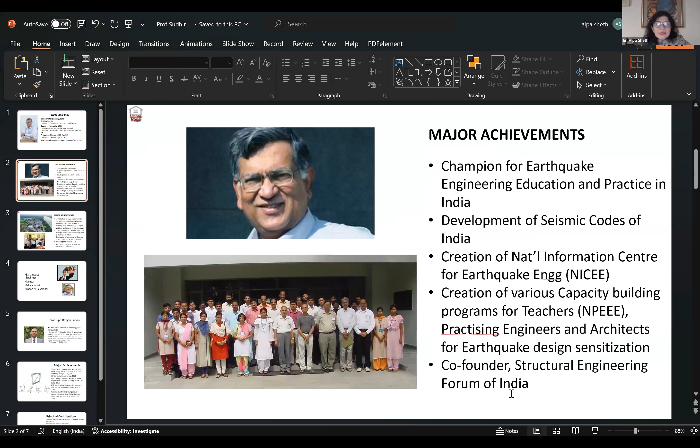So, I think most of us know about Professor Jain's achievements. He has been a champion for earthquake engineering education and earthquake engineering practice in India. I would say that in some ways he ended up being such a rock star as far as the dissemination and sensitization of earthquake engineering in the country, that one of the complaints I nowadays have as practicing engineers,

is that young engineers who are coming out are more worried about the buildings' behavior during earthquakes, and they are not in the least bit bothered about the 24/7 gravity loads. So I would say that this in a way is a compliment to his persuasive abilities in putting the agenda of earthquake engineering in the forefront.

And I think that definitely everybody would accept that he has been the principal leader in this field of earthquake engineering in India. He's also been one of the leaders in the development of seismic codes of India. And I hope that there'll be more participation from him in the time to come.

He's also created numerous institutions, one of which is NICEE. I think anybody who is presently in SEFI must have at some point in their lives gone to the NICEE website or gone to IIT Kanpur and tried to utilize the resources available at NICEE.

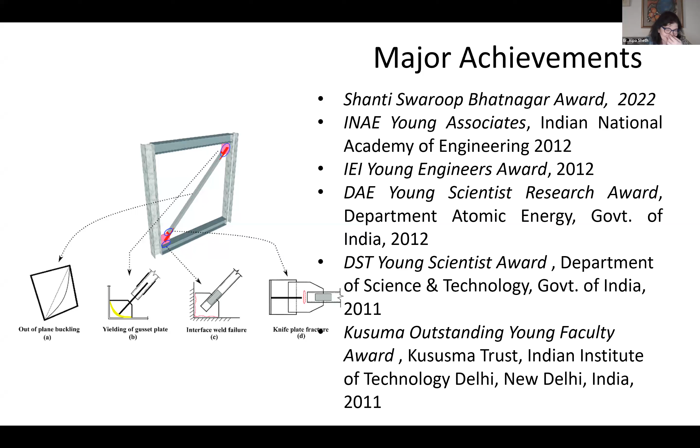So I think Professor Sahoo has displayed amazing ability at a very young age, and Professor Sudhir Jain and of course Professor Durgesh Rai must feel very proud of their student, their protege, if I may. And I would like to hear what they did right, and what was the special bright spark that they had seen in Professor Dipti Sahoo. And as I said, the principal contributions of Professor Sahoo have been in energy dissipation devices.

I had actually once connected with him for buckling restrained braced frames because it was something I was very interested in. And I even talked to him about steel plate shear walls. He's always very interested in trying out new things, and he's a fountain of energy and excitement. So it's a joy to work with him, especially when it's not just about getting a project peer reviewed and stamped, because that's what unfortunately a lot of the IITs now have to do because of pressures from various authorities. Professor Sahoo was refreshingly different, if I may say that.

So here, I would like to stop talking because we've congregated to hear the two speakers, the two celebrated and recognized leaders in this field. So over to you, Professor Jain. Thank you.

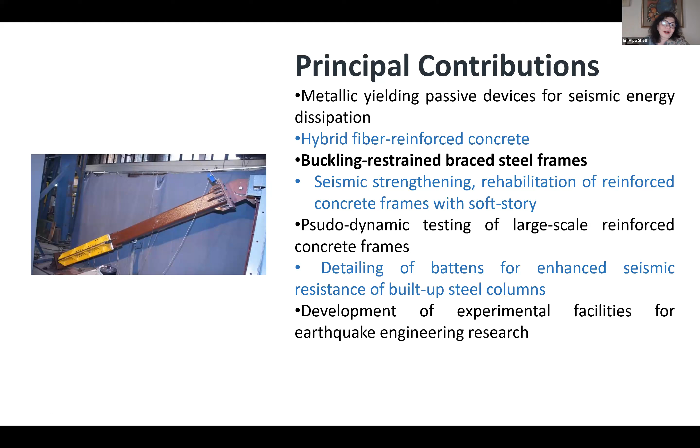All right. Thank you, Alpa. I don't have slides; in my current role, I don't get time to do justice to these kinds of expectations. Thank you for your very generous introduction and for this opportunity to come back to the structural engineering community. I see 110, 115 people showing up as participants. So this is a life that I left behind. And once in a while, when I meet people from a structural engineering background, I'm really delighted.

I'm very, very proud to be claiming that I have been Dipti's teacher. As I have fondly said, we teachers get the reflected glory of our students. If our students do well, we become well known. We claim that we are their teachers.

So I'm really, really proud of Dipti and for what he has done and what he continues to do in his career. And I wish him many, many more successes.

Now, the topic that you gave me to talk about is how to develop the temperament for research in the structural engineering community. Let me start out by first asking a question. What is research? Is research publishing papers?

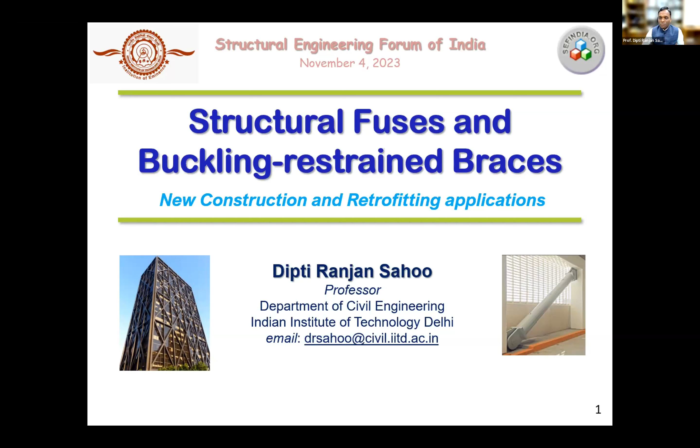So I will quickly highlight the work my group and my students are working on. I will be highlighting the work which is relevant to energy dissipation. So the topic is structural fuses and buckling-restrained braces. I will also talk about the applications in new construction and retrofitting applications.

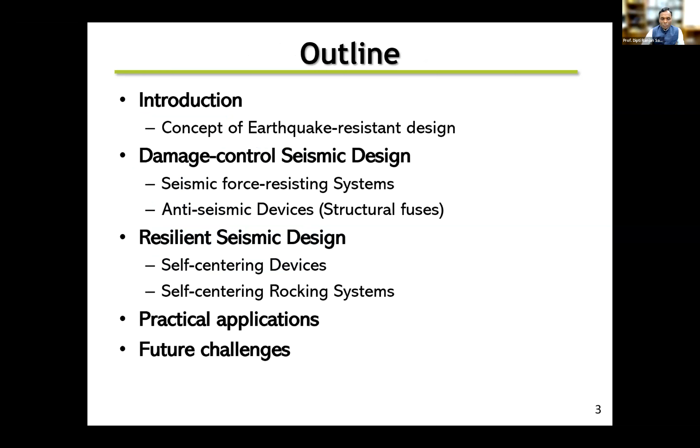So just to outline today's presentation, I will briefly talk about the introduction. I will try to highlight two things. One is called damage control design. One is called resilient design. Then I will come to the practical application and what the challenges are. I thought that will be most useful for our young engineers and researchers to think differently in the context of seismic design.

So till now, in earthquake resistant design, we don't design a structure to remain elastic because it has the inherent properties of post-yield strength, whether it's the material or the redundancy. So we expect that the structure should go to the inelastic range, and instead of linear elastic behavior, we expect inelastic behavior, and that means you are actually expecting some kind of damage in the structure.

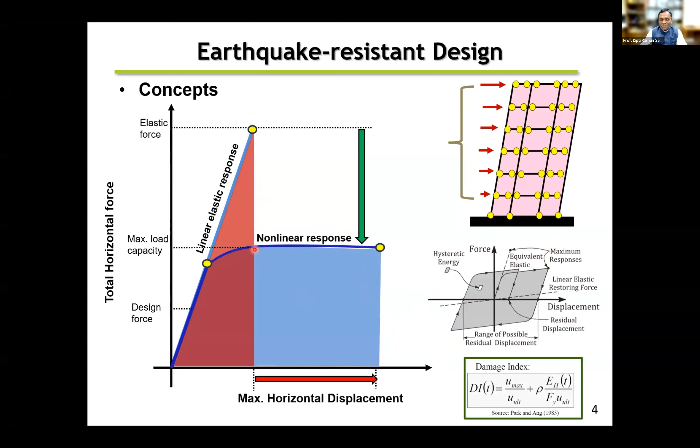So under cyclic loading, you will get some energy dissipation in terms of the damage in the beams and columns. One important point to note is that here we are relying on the ductility of the structure. That's why the conventional design procedure is called ductility-based design. Now, if you look at the basic design, this is essentially the mass into acceleration, and then that force we get, and we actually design the structure to behave in a non-linear way.

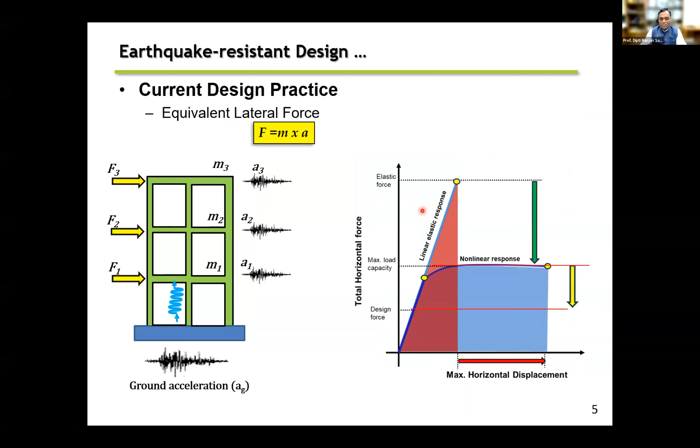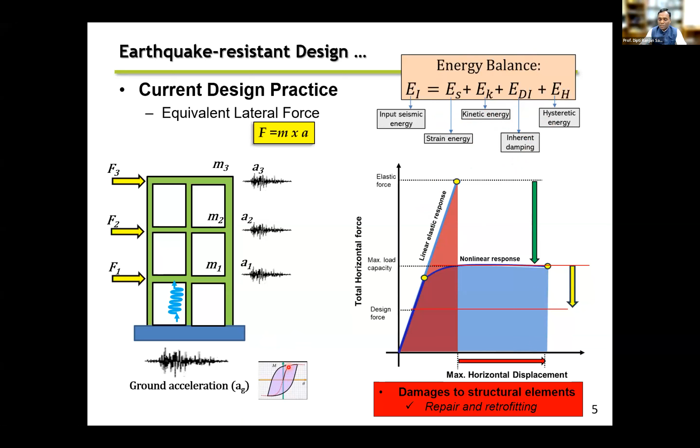But if you look more clearly, there is an equation which is called the energy balance equation. The input energy you are sending to your structure is somewhere getting balanced by so many factors. One of them is strain energy, which you get from any member. One of them is kinetic energy. Then every material has some damping, and then the most important part is the hysteretic part, or the so-called damage part.

So what are the strategies if you need to reduce the damage or reduce the collapse of the structure? Essentially, in the same equation, you probably have very limited chance for a given structure to change the static or strain energy component or the kinetic energy component. What I can do is increase the hysteretic energy component, or increase the damping component, or increase both of them.

The first part can be done by adding some additional members, which is called stiffening. It can be a simple brace also. The second component can be done by adding an actual damper; there are so many concepts on dampers. The easiest concept we thought of is some kind of viscous-based damper. But if my stiffening system, let's say the brace, is not going to be elastic, at some point in time it is also going to give hysteretic energy, and we have some damping from the hysteresis as well.

So in a sense, if we can control or enhance these two components, the input energy in the energy balance equation can be controlled well without damaging our beams and columns, the primary components of any structure. People can ask, when you are stiffening the system, you are attracting higher seismic forces. The point here is, I am not expecting that it will be elastic. It will be a kind of sacrificial element.

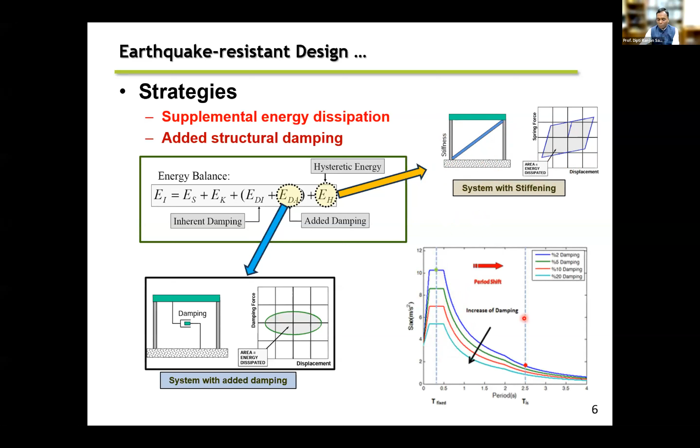When you have additional damping, your response spectrum peak values will keep coming down. So for all the devices I'm going to talk about, one component is the structural damping; every material has some kind of damping. I'm not talking about the inherent damping. I'm talking about added damping, like a viscous damper or friction-based damper, any damper, so that you can increase the added damping component. For comparison, inherent damping is about 1 or 2% for steel and 5% for concrete.

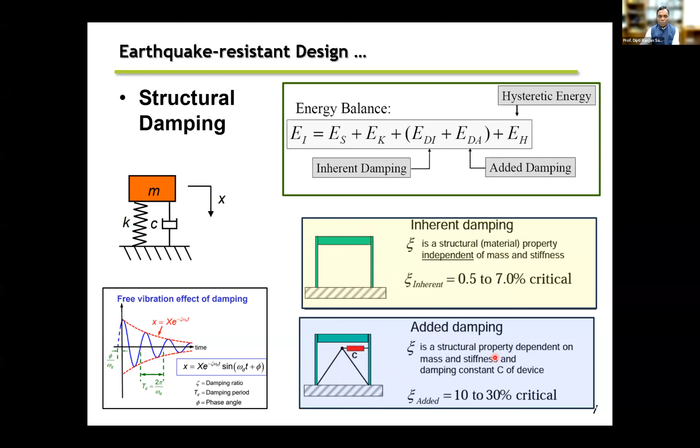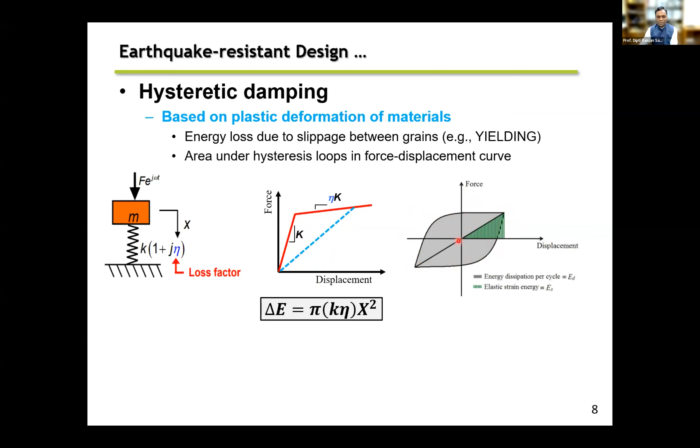So if we add a device which can give you higher damping, you are reducing the response of the structure and the design force to be considered for a new or retrofitted structure. Damping can be based on friction or on viscosity. The most important, and I feel the least expensive way to get this, is hysteretic damping, essentially through metallic yielding. It can be steel, aluminum, or any other metal. You rely on expanding the hysteresis area; the more the area, the more energy dissipated. Comparing with hysteretic damping, you can get an approximate idea of what percent of damping we can get for a given material or configuration.

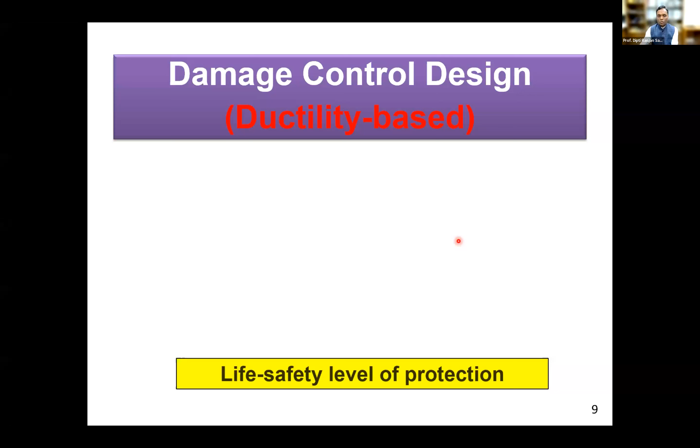So with this as the background, I'm going to talk about two things. One is called damage control design, where you have the strong column, weak beam kind of concept, which is essentially ductility-based.

So instead of a linear elastic system, you have a non-linear inelastic system, but essentially you are trying to see that most of the energy will be dissipated through the hysteretic damping. In this kind of structure, in this kind of design, the goal is to get a life safety level of protection. So in some cases it is good. In some cases you probably need to go beyond that. So that I'll come to in the second part of this presentation.

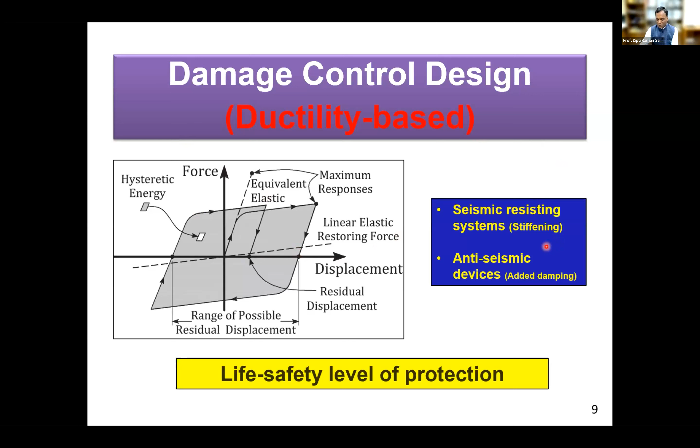One thing I have already explained, that either we can use a stiffening system or we can use some kind of additional damping devices, and very commonly we call them anti-seismic devices or structural fuses. At the same time, you have to also make sure that the cost of this stiffening system or of developing a device should not be very expensive, so the overall cost of the structure should not increase significantly.

Based on the available materials, steel is probably widely used, particularly in the context of India, which is one of the topmost producers of steel. If we can exploit the steel properties in different ways, it can be used for both concepts, either as a stiffening concept or as a device concept. The advantage is it's not a mechanical device, so maintenance cost is also very low, and it can be customized to get the desired level of protection to the structure.

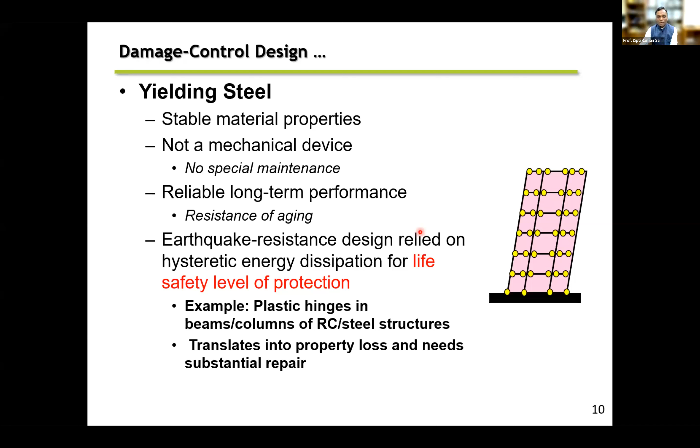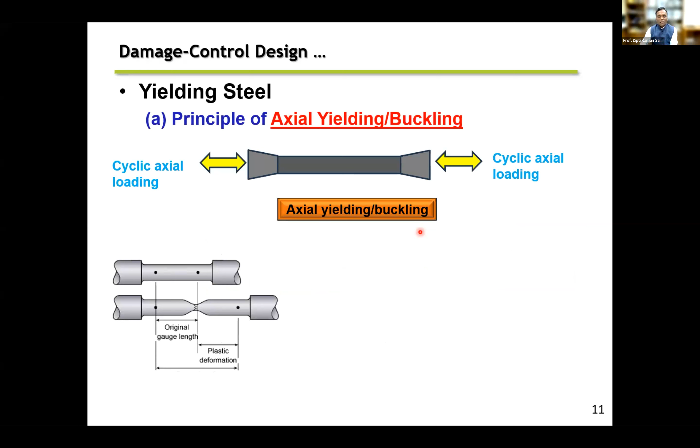So let's say I have a steel plate. I can pull it in tension and compression, which we do in the first year or second year civil engineering courses, to find out the stress strain curve. Now, if we do the cyclic loading, in one part you will get strain hardening, yielding, in the other part you have the buckling. So we have been using this concept in the concentric brace frames.

Now the question is, the whole idea of the seismic design concept, which is based on ductility, is to get a wider hysteretic loop. We know that any steel member has buckling. If we can control the buckling of the element, you can get a stable hysteretic loop with a bigger area, with a bigger energy dissipation.

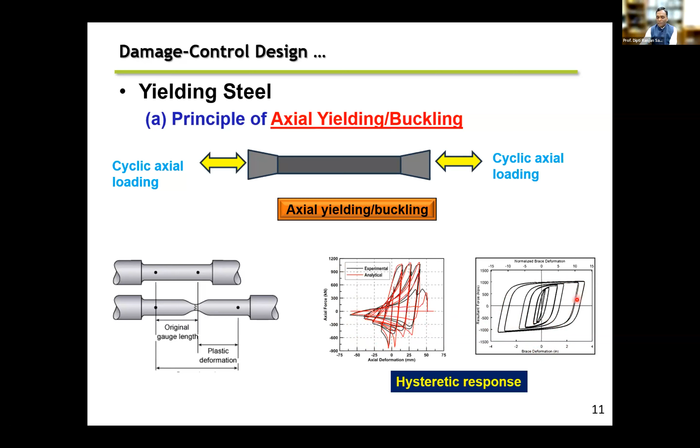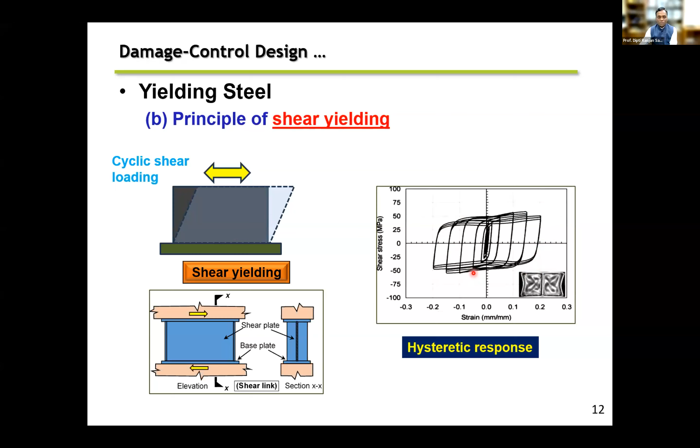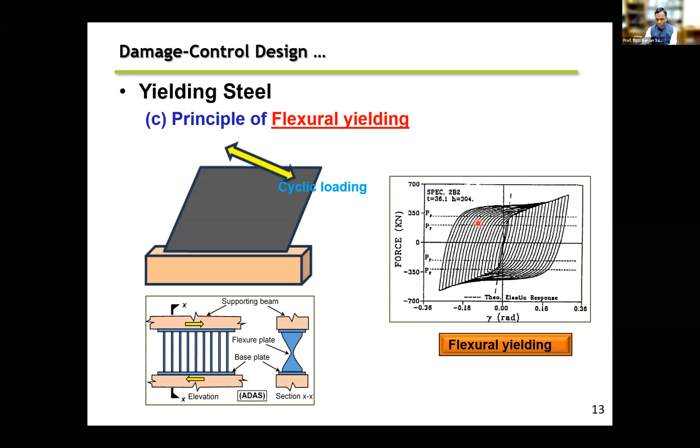The second one is the same steel plate. If I orient it in such a way that the loading is in plane, we get the shear loading, and that also gives you a hysteretic loop on par with your tension or compression loading. The third part is the same steel plate oriented in such a way that it takes care of the out of plane loading. For example, these are some series of plates. If you do the cyclic testing, you will get flexural yielding, and that gives you the hysteretic response. So the same plate, in tension, shear or flexural loading, I can exploit and get some energy dissipation.

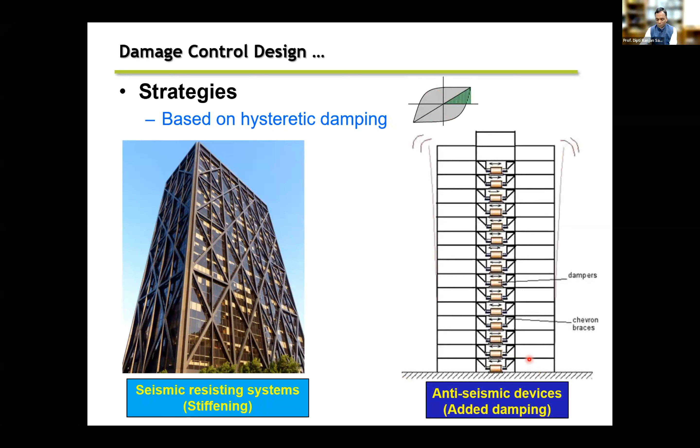So what are the strategies to get the hysteretic damping? I'm going to talk about two things, mostly based on steel. One is the stiffening system, one is the structural damping or added damping system. One common thing which we use in most cases, whether it's a steel or concrete building, is the brace. Typically we use a pair of braces. One brace goes in tension, one brace goes in compression.

In compression, once it's buckled, you lose a lot of area. You don't have that kind of energy. But it's not that simple. It is not only the brace, the connection also plays an important role in any steel brace frame. The typical experimental behavior of a buckled brace is something like this. That means there will be some damage at the middle and the ends. At the end of the earthquake, either you have to remove the complete brace or the brace with the assembly. So there are two concepts. In the American concept, they use the weaker gusset plate.

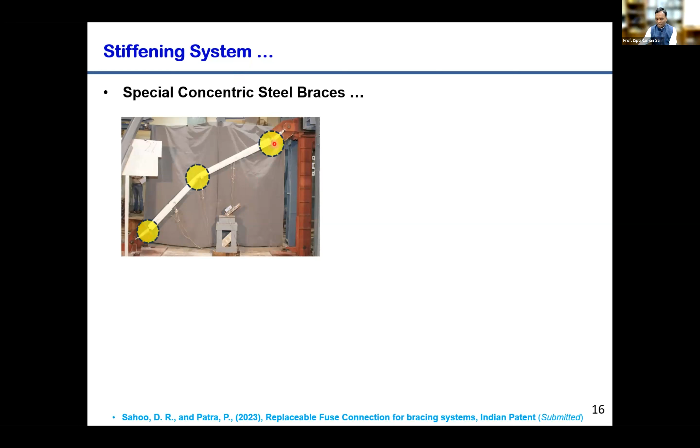In the Japanese concept, they use the stronger gusset plate. In India, they use both actually. So the idea is, can we have a better connection system, which probably behaves better or gives you more energy dissipation? I'm talking about both the ends.

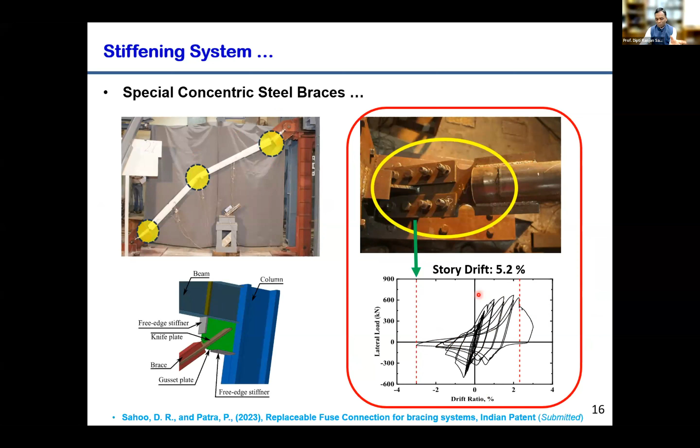Or the recent one, what we have said is, since anyway you need to have some energy dissipation at the ends, can we actually use some kind of fuse system along with your brace? It's a simple system which can be added to both ends or only one end of the brace. And you can see this is one of the test results I'm showing. You can reach up to 5% drift. In the typical braced frame, getting 2 to 2.5% drift is very, very tough.

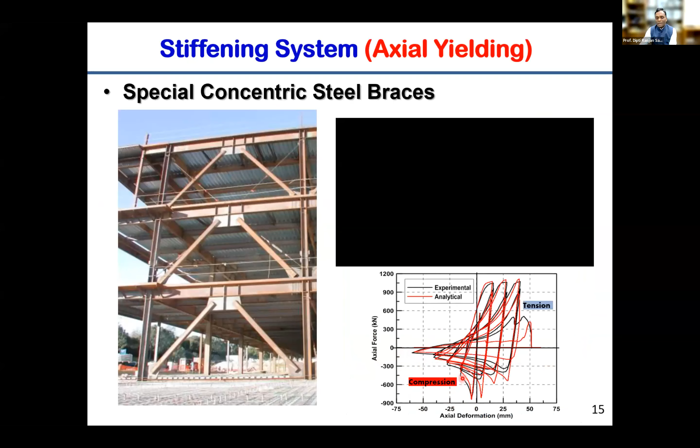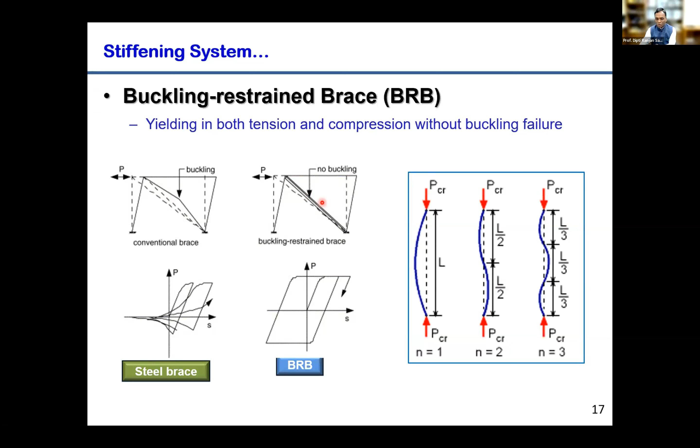Now, as I said in the previous example, you have a buckling problem here, and can we reduce this problem, or can we have a loop where this area is covered? So taking that as the clue, from structural analysis, we know that there is a concept called buckling. If you provide more restraint, your buckling strength is increased, and that gives the basics of the buckling restrained brace. It is the same brace system or same structural tube or plate. What you do is you put it in a sleeve, and there is no composite action.

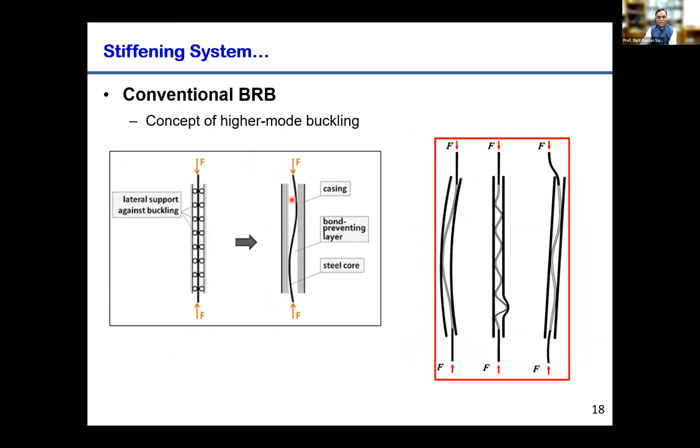And the idea of that sleeve is it just provides a preferential direction of movement of the plate. That is something I'm trying to show here. You have a plate here, which is placed inside a tube. Of course, different materials can be used. The only thing is, it is not a composite member. It just stays there to prevent the out-of-plane buckling of this plate. So there are many components involved in these buckling restrained braces.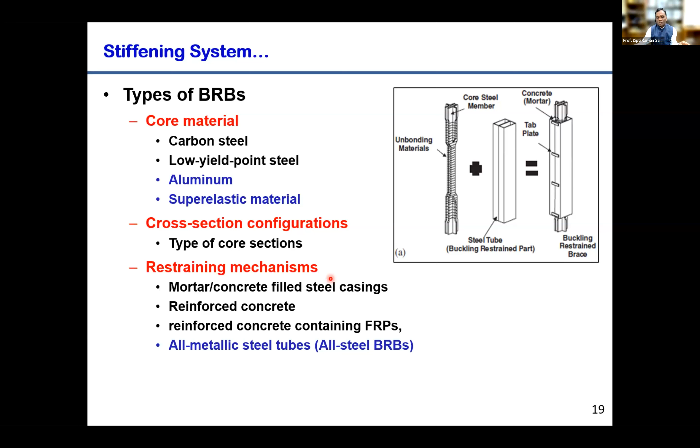So what we have worked on is to optimize this. That is number one. Number two, these braces are quite expensive. So in India, can we make less expensive braces using the local material available in India? And the third point is looking at the society: can these braces be made at the site? So looking at all these things, we developed this brace, called an all-steel buckling restrained brace, which allows inspection after the earthquake to see how it behaves. It allows on-site fabrication, and it can be implemented at the site with the least cost. The cost part, I'll come to later during the discussion time.

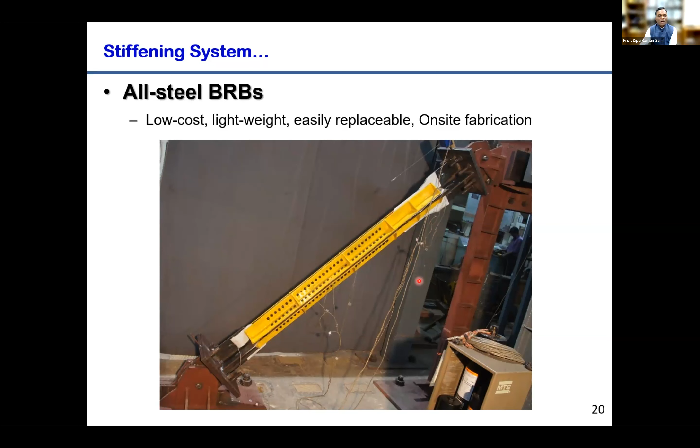So this is one of the typical BRBs which we have developed, and you can see how they performed in the testing. We have done some tests here, and some of the patents are also mentioned here. Now, in a typical structure, that's how the BRBs can be placed. So instead of simply putting a brace which is prone to buckling, a BRB is a good option, provided the cost is on par with your concentric braces.

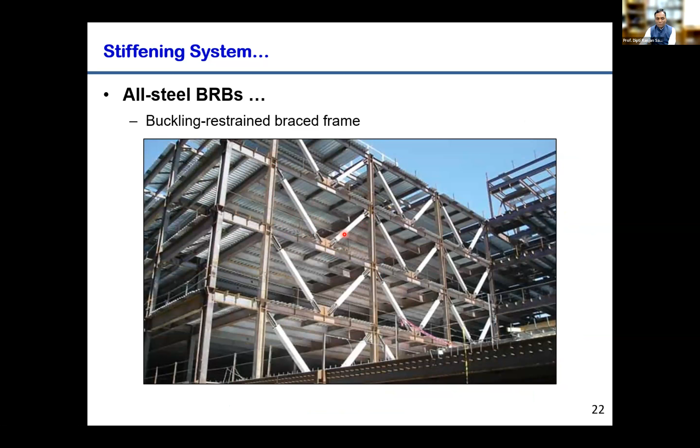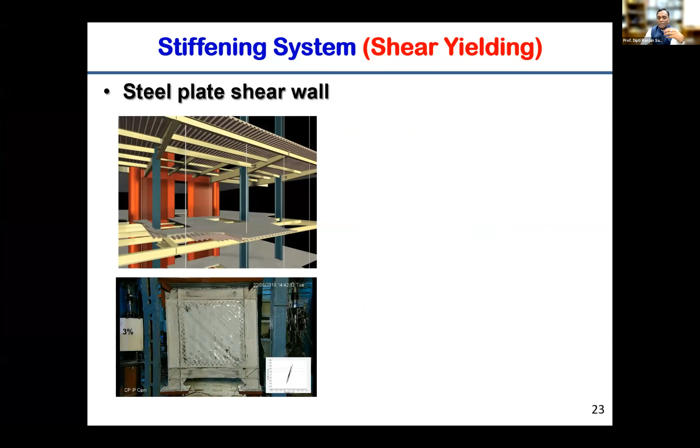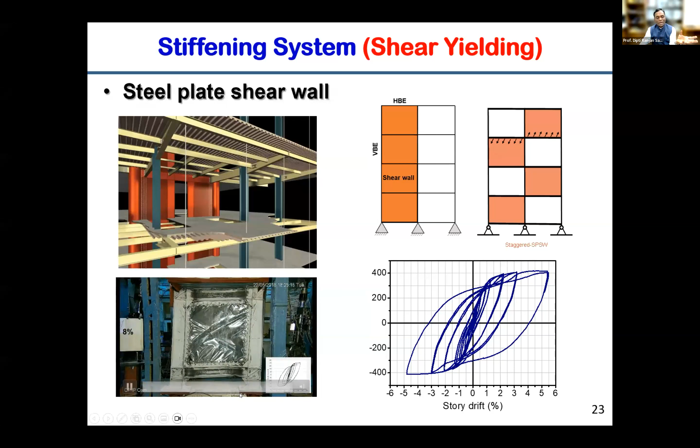So what happens is, when you apply the in-plane shear, this very thin steel plate will buckle. But once it is buckled in both directions, you will see that some area of the steel plate acts as a plate in tension. And that gives you the hysteretic behavior we are looking for: there is no instability, and there is sufficient strength and stability. So this is one of the tests. You can see, when it's going in the negative direction, you get a diagonal strip which is active in resisting the loading.

The third system is called the steel truss moment frame, which sometimes is called the column free structure. Column free structure means the concept of not using the typical beam system. So it's an open girder system. Instead of a beam, you use a small truss in the same structure. And when you apply the lateral loading, this part is called the Vierendeel part. It deforms something like this.

You will get the plastic hinges here. So the shear and flexural yielding will help you to give this kind of energy. This is the experimental curve. Again, we tested a 15 feet long steel truss moment frame. This is a new concept. The only thing is, instead of using a rectangular beam or a steel beam, it's just a truss which is replacing your beam.

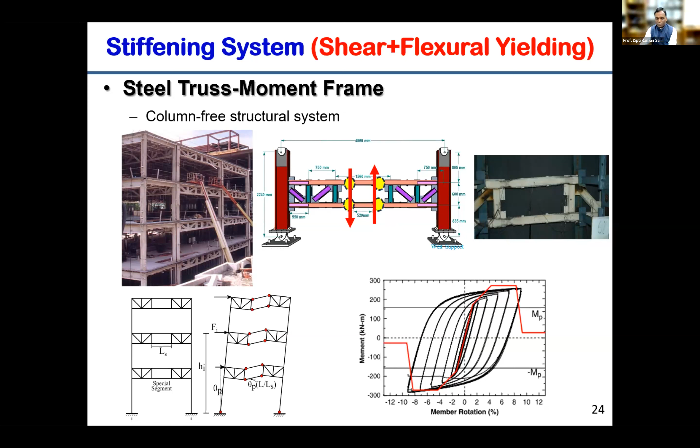The advantage is in the buildings, both the panels can be used for the units, and the middle one can be used for the corridors. And in this panel, you can allow the ducts, whether it's an electrical duct or any kind of service line, to be placed there.

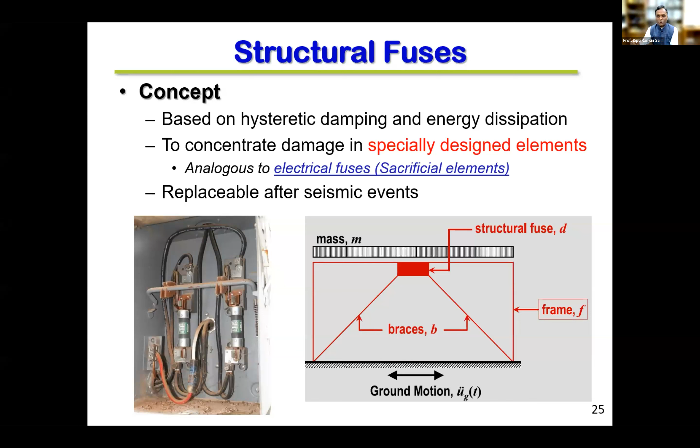Coming to the structural fuses, all the systems I talked about are stiffening systems. Structural fuses are just a small device which will be installed in a structure, and the whole idea is that whenever there is an earthquake, the first one to be damaged, absorbing the energy, is that system. If you correlate to electrical engineering, in every unit there is an electrical fuse. Whenever there is a high voltage, that fuse burns away. So the same concept is here.

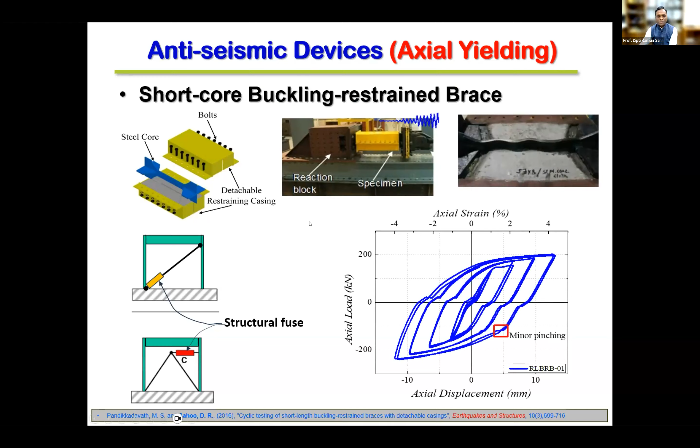Again, the concept I'm using here is using steel to make small units. It comes from your buckling restrained brace, where it can be made as small as possible. But the concept here is a little different from the whole BRB base, but I'm not going in detail into that. It's a small device which can be lifted by only 2 persons. It can be installed at the site along with the brace or at any location of the buildings or the bridges.

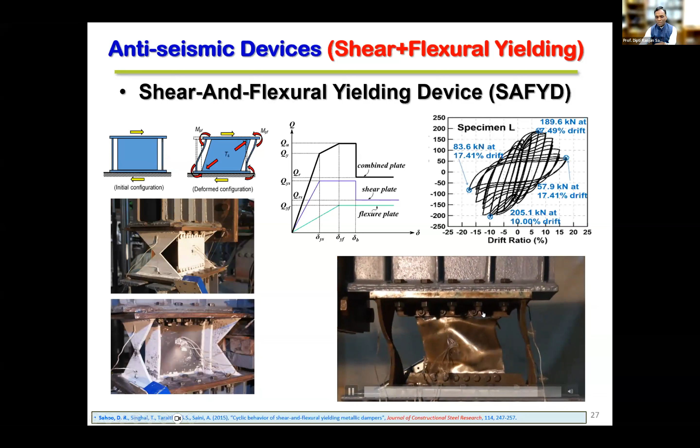The second one, again, is a small shear link, which I extended from my PhD, which I did at IIT Kanpur. So it's a shear link with a multi-panel, and it also takes care of the shear yielding and flexural yielding. The triangular plates act for the flexure, and these plates act as shear plates. The problem is this needs to be replaced. You can see the tearing of the plates in high seismic loading.

So what we extended is, if we can prevent the buckling of this plate by some kind of mechanism, essentially to develop some kind of sandwich system, whether it is a steel core or an aluminum core, you can see that the complete buckling is prevented, and you get a very stable hysteretic loop.

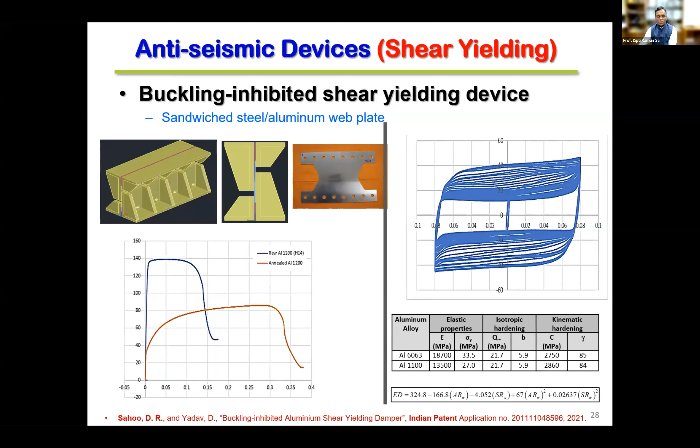Now, coming to the second part of this series. Till now, in terms of seismic design, in case of earthquake, the goal is to save the people, so it's life safety. Now, in this process, if you remember the previous slide, the intention is to widen or get a bigger area. But at the end of the earthquake, what happens? You will be here. That means there will be residual drift of the structure.

So here also I'm going to talk about two systems. One is the device, what kind of devices we have developed, so that rather than a fully hysteretic response, at the end of the day it should come back to nearly its original position. And the second one is we can combine them into a system where your self-centering device is there along with a system.

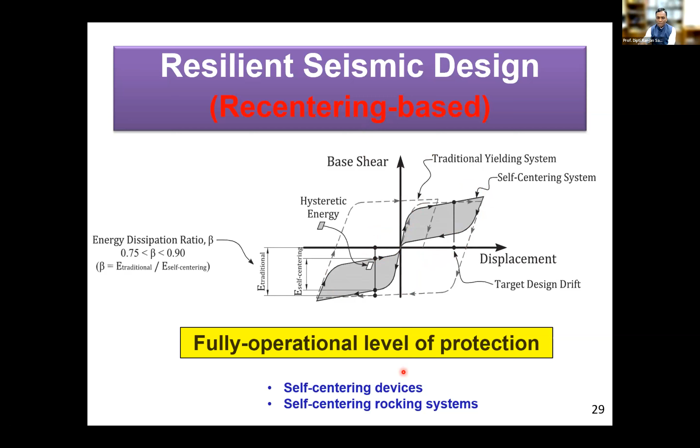They're working together to pull back the structure to its original position. So this is the first system. Before I go into detail on this device, if you see the hysteretic loop here, rather than a parallelogram kind of thing, there is a multi-stage hysteretic response or loop. And you can see that if you just unload your system, it's actually pulling back to its original position.

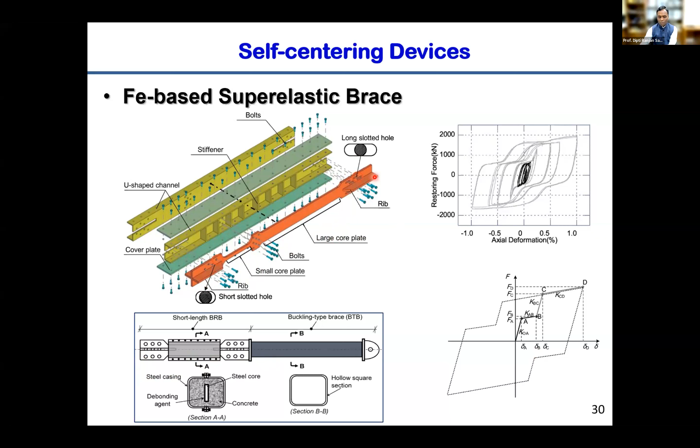So it's a simple concept, but doing that in practice... So we have used different kinds of materials here. We started with steel again. So it can be a small BRB with a larger BRB system, where during small earthquake loading only one BRB will be yielded, whereas the remaining will be unyielded. And then when you do the unloading or higher loading, they both will combine, and it will give you this kind of hysteretic response.

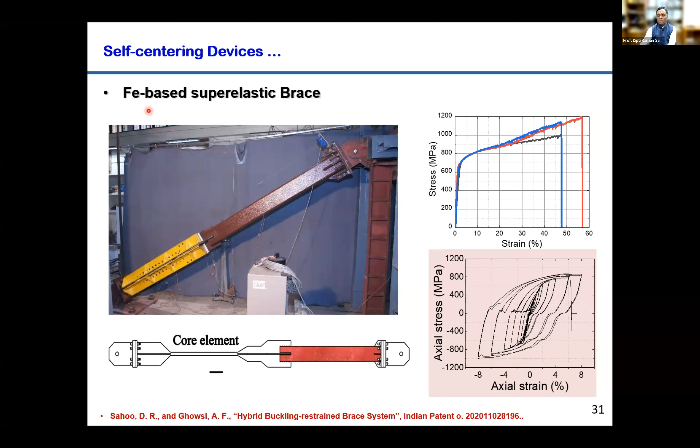So this is one of the specimens, which we have fabricated and tested in our lab. That is called the Fe-based superelastic brace. So we started with steel, and we found that steel probably will be okay, but getting the recentering is difficult. So we collaborated with a company in India to give a product which is similar to steel, but with some characteristics of shape memory alloy. I will come to what the shape memory alloy material is. So this is a typical application where the same system can be used.

So coming to the shape memory alloy, it is a special alloy which is sensitive to temperature, and it gives you the pre-stressing force or resistance through a thermally activated phase transformation. This is one of the videos I'm showing here. So if you pull it, it gives some self elasticity or super elasticity, and then for the remaining portion, once you apply some heat, it will come back to its original position.

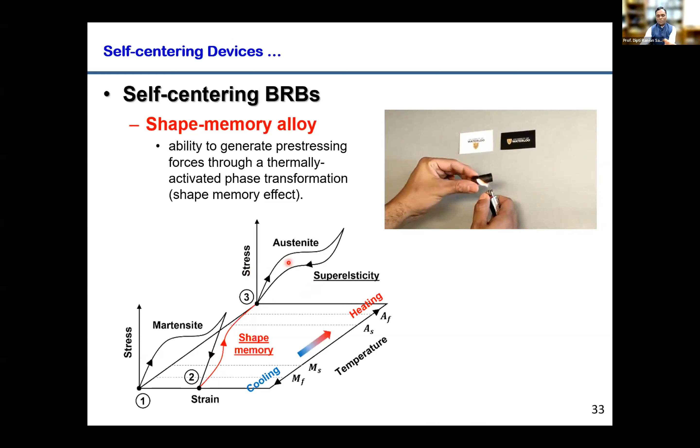So we utilized this concept and talked to that company to make a material which is a combination of shape memory alloy and steel, so that the steel will give the ductility and the shape memory alloy will give you the recentering. This is the typical behavior of a shape memory alloy. So we tried to use this with the BRB. Again, I have to show this video, so just excuse me.

Since it's a rod or wire, shape memory wire, these wires are covering all around the BRB, but the wire can't take compressive force. You need a system where, whether the brace is under compression or tension, the wire is always in tension. So it's a multi-tube system. The inner one is the BRB, then there is another tube, then there are 4 wires or strands, and these strands are made from shape memory alloy.

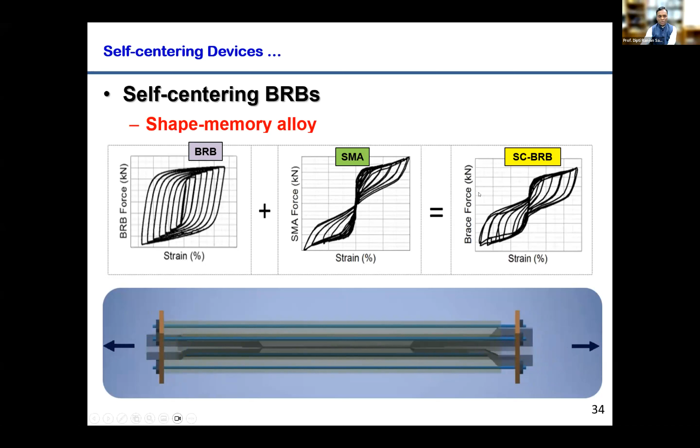So if you add the BRB behavior, which we intended for ductility-based design, and combine the shape memory alloy behavior, what you get is something like this. In typical ductility-based design, your residual drift at the end of the earthquake would have been here, but you can see that you are close to your starting position. That's one of the devices. In more detail, this is the BRB, this is the shape memory alloy, and these combine to give a self-centering BRB. This is one of the specimens we fabricated and tested at IIT Delhi.

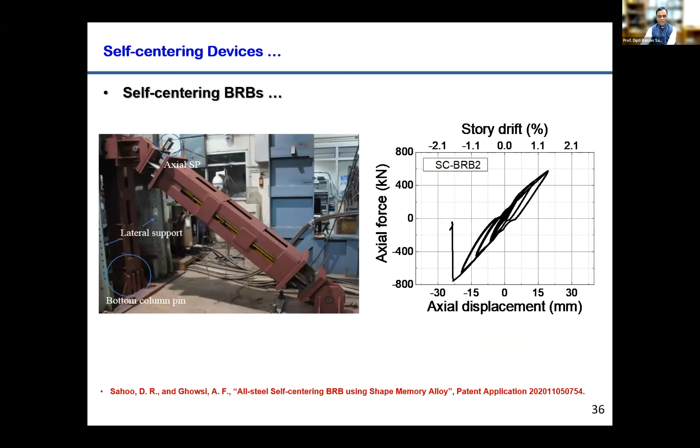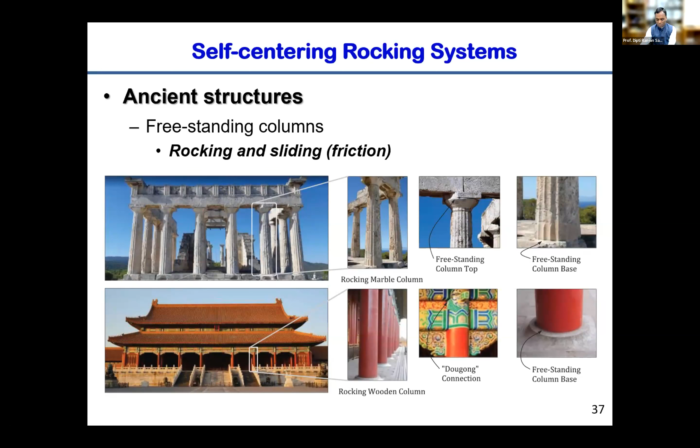Now, coming to the self-centering rocking system, this is based on ancient structures. Most Greek structures are freestanding columns. There are no physical connections, so they are simply allowed to rock and slide. But these structures have survived so many earthquakes. So the idea of rocking and sliding, sliding being friction between 2 surfaces, can also be used in our typical civil engineering structures. That is how the rocking system is integrated.

Now, what to do? Let's say you have a building. The building can be simply placed on a few pillars, and these pillars have no foundations, there are no connections. But since you have the significant weight of the building, this can't be only steel or concrete.

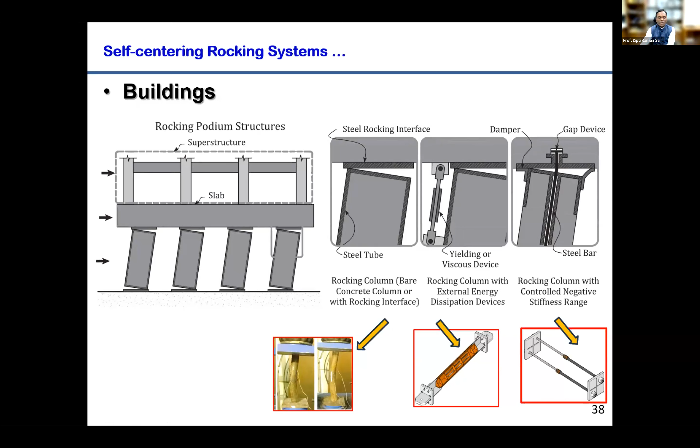The best way is probably to use concrete filled composite structures, and so this can be a concrete filled steel tube. And if you need to have a recentering behavior, you can actually add the BRB, everything we are doing below the foundation, or you can have steel prestressing wires. It can be shape memory alloy based or any super elastic wires. I'm just trying to give you some kind of idea where these devices can be used.

This can be used at the base level. Remember that this is a rocking system, so there is no connection of the column to the base. It's simply free actually. So when you apply the lateral loading, this column will simply go up. However, you have some device which may be viscous based, metallic based or friction based. It will just allow some displacement and then pull back the system.

The shear yielding devices can be used between two towers, maybe steel or concrete towers. In typical high-rise buildings, you have a beam which is called the coupling beam, and that is one of the locations we have tested with a few energy dissipation devices; it can actually improve the structural behavior or seismic behavior of this.

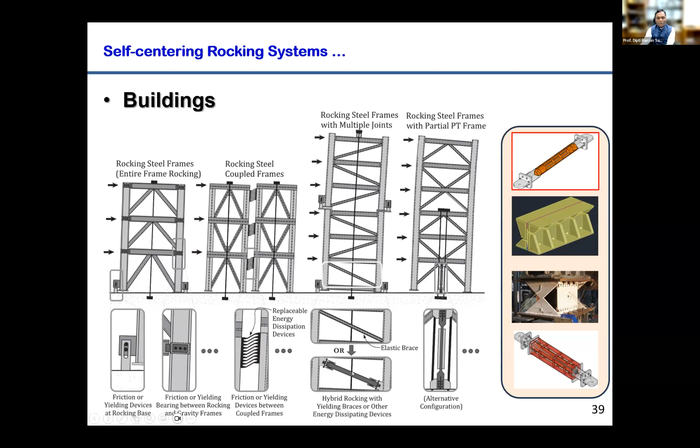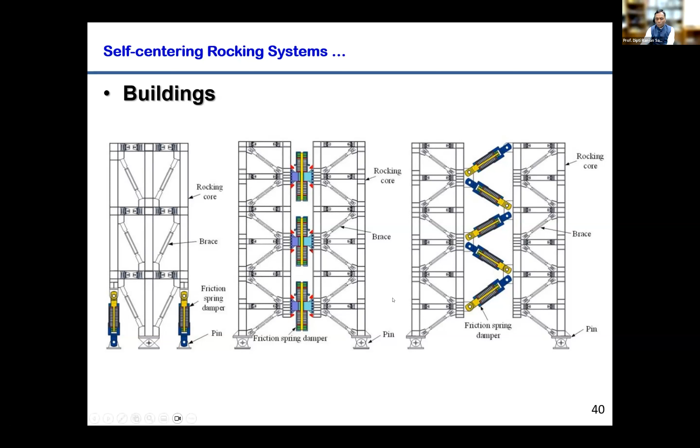Similarly, there are many applications where it can be used, let's say at the beam column corners or simply at the panels. One of the interesting things I'm saying here is that even the BRB can be used as your columns. So instead of your typical conventional steel or concrete columns, the columns of the lateral load resisting system can be made of BRBs you design for that. It can be a series of BRBs, or friction-based devices that can provide the energy dissipation and the recentering. These are a few other possibilities where the devices can be used.

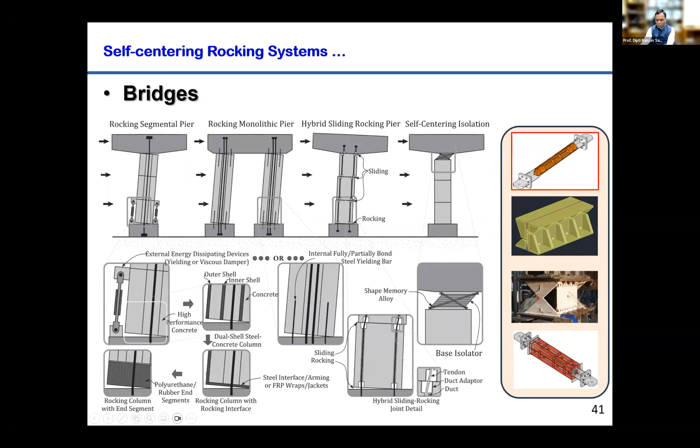In the case of bridges, the same application can be used. Shear links or yielding devices can be used between the pier and the superstructure, or in bridges we use pre-stressed wires in the superstructure, but the rocking system can be used in the piers with pre-stressing applications, and there are so many ways this can be used based on the site conditions.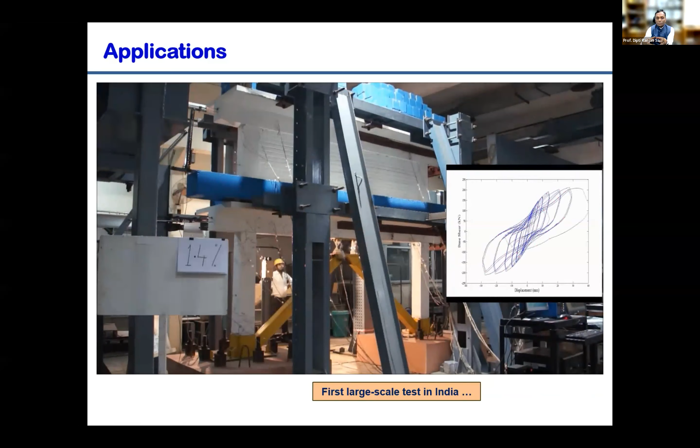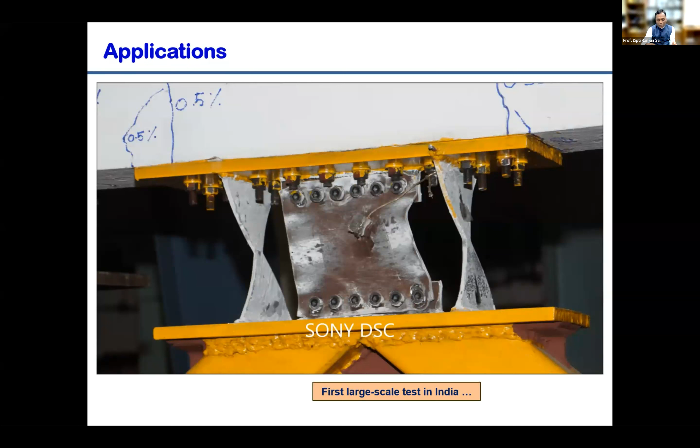This is one of the tests we did at IIT Delhi. One of the major problems in India is the open ground story problem. This is a two-story structure we tested, and the whole idea was, since the story is used for parking, only a few panels or bays can be used to install the braces, because anyway the structure behavior is controlled only at the open story. Numerically we have tested several configurations, and experimentally we did this representative structure.

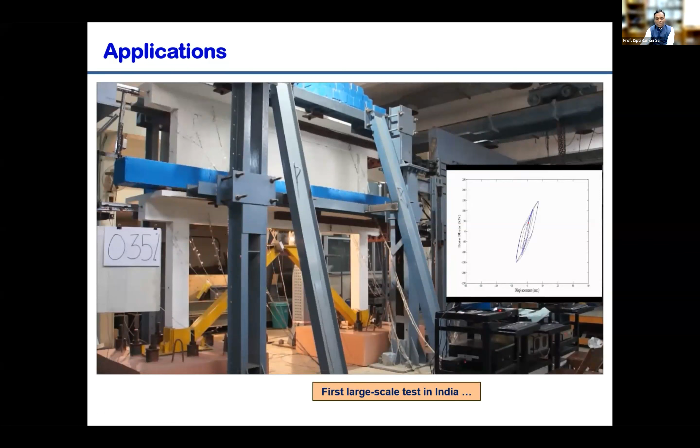You will see this here. The top one is completely filled with masonry bricks, and the bottom one is essentially meant to be free for different applications. We used some kind of devices here, and it actually performed well in real hybrid seismic testing.

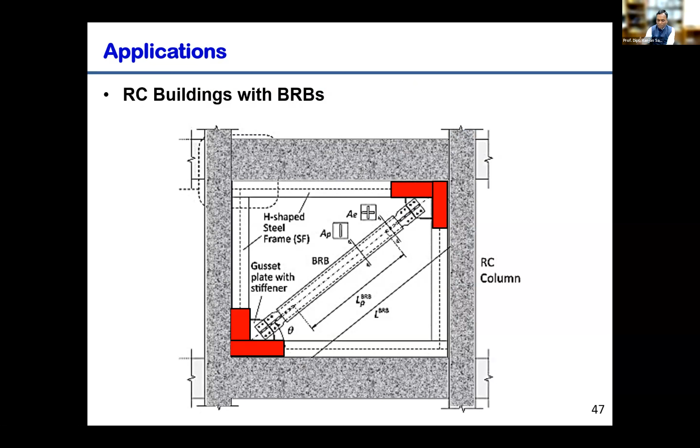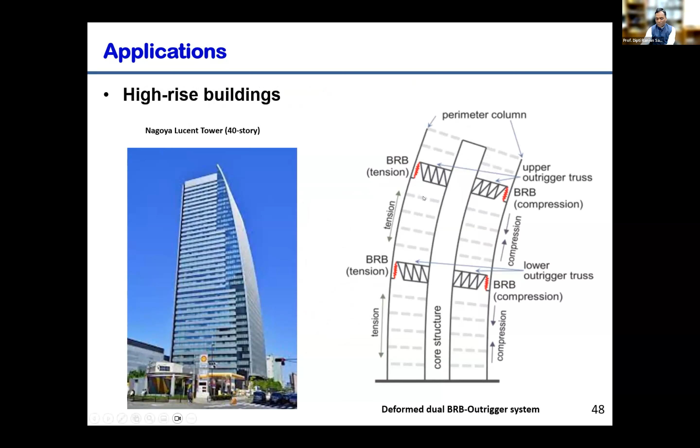For retrofitting applications, I'm again showing this for school buildings. We have been talking to some schools here, where you have the beams and the columns. They are quite old, and you can't actually demolish them. So these kinds of devices can be used there. In high-rise buildings, there is no need to provide these devices on all the floors. One potential location is the outriggers, where even small BRBs can be adapted. Similarly for bridges, there are two girders. In between the two girders, the BRB can be placed.

So just to conclude, what are the future directions? Of course, there is a lot of work that needs to be done in structural control. We need to have efficient materials. For example, shape memory alloy is mostly used for aerospace structures.

Steel is used in the civil structure. So yeah, they have their own properties. If you combine those, it actually gives you additional benefits, additional advantages. And in addition to that, any other material can be used in terms of fiber, the carbon fiber; there are so many areas right now. The material research field is quite extensive.

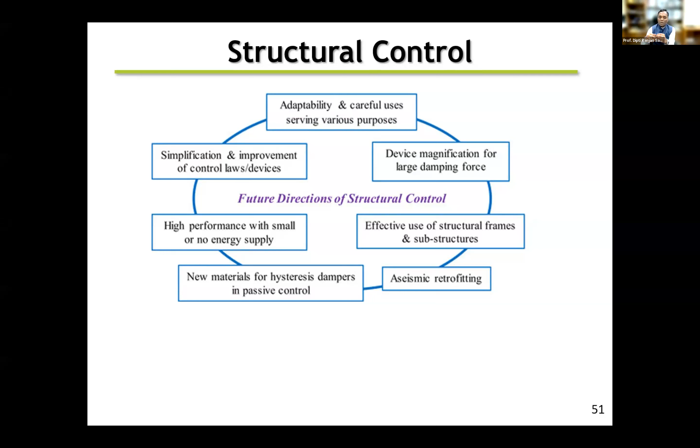So there we need to have collaboration. The whole idea is the devices should be least expensive, affordable, and easily implementable, rather than importing from the outside to the construction industry in India. The second one is risk reduction: what strategies should be taken to minimize the risk, whether it is in a slum area or a fully engineered building area. A lot of research has been done, but how to implement that in practice needs to be done in the future.

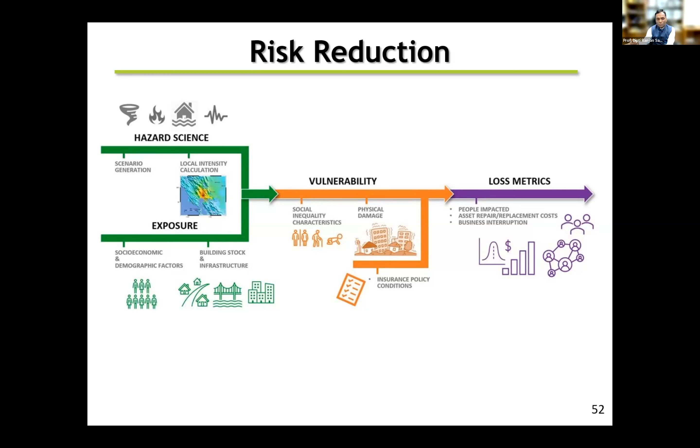The third one is early warning. People are working on whether we can predict the earthquake. But one interesting thing here is, if you look at the earthquake accelerogram, you have a P wave, you have an S wave. Those are relatively less damaging before the surface wave hits. So between the P wave and the most damaging surface waves, there is a time. And this time can be utilized not for preventing the earthquake, but for making our infrastructure safer. That has been done to some extent.

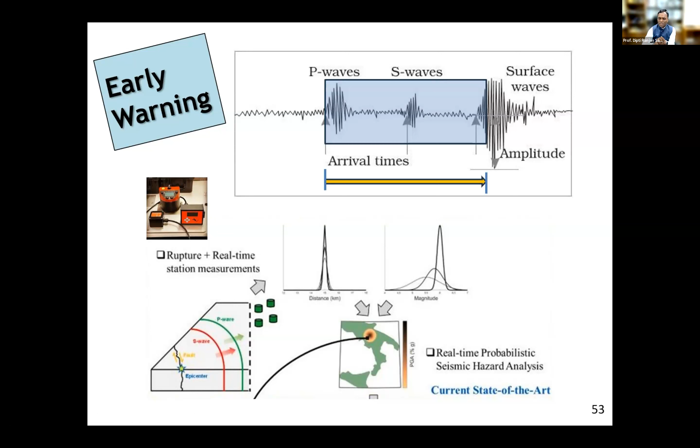The current state of the art is to do a real-time probabilistic seismic hazard analysis. But if we can extend this, for example, in real time, let's say you have a 10 or 15 second gap, and you integrate your signaling system with your sensors, so that during the earthquake it can be directly propagated to society, whether it's a bridge or the metro or these kinds of structures. That I call the next generation early warning systems.